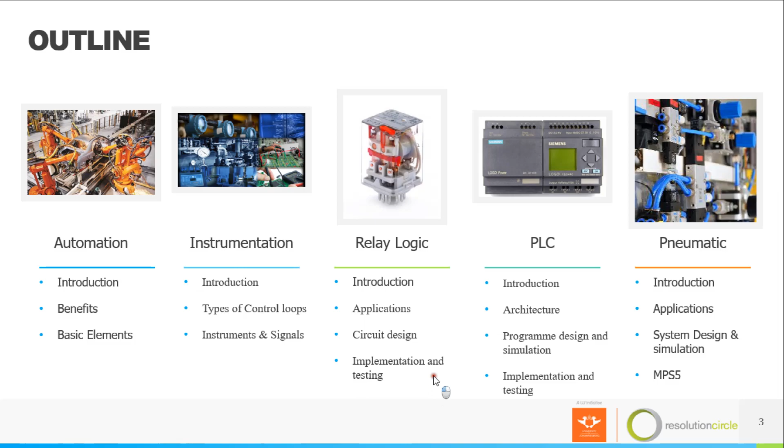One may ask, what is automation? Automation is any system or anything that works with minimal or without human assistance. So if you go to the workshop, let's say for instance after lunch or in the morning, you'll find the workshop dark. The moment you step in, the light turns on. No one is switching on the lights. They switch on automatically because of a PIR sensor. The motion detector detects your motion, then switches on the light. As you leave the workshop, the motion detector detects that there is no one in the workshop, then it will turn off the light.

The manual way of doing it is the way we do it at home. We have a switch on the wall. When you want to switch on the light, you press the switch, the light comes on. You press the switch again, the light comes off. That is the manual way of doing it. To automate it, you just put a sensor that will detect if there is someone in the room, then the light will be on. If there is no one, the light will switch off.

Another example will be automatic cars. So what happens with automatic cars, instead of you changing the gears, the car changes the gears by itself. As you accelerate, it will change from gear 2 to gear 3 as you accelerate. The only thing you have to do is to accelerate or brake.

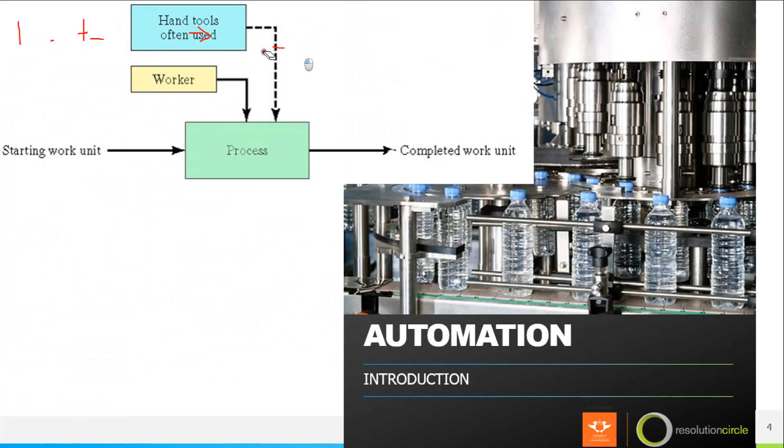So what I was explaining basically is what you see on the screen. So our product used to start here, then with manual work or your hand tools, you will do the job, which will be the process. Then we'll have a complete product.

Then we migrated into a second or third industrial revolution. Now it's both human and a machine that do the work. If you go to most manufacturing plants today, you'll see there is a section where there is a robot that does the work. When the robot is done, a human being will take that to another station.

But as we move into the fourth, as the technology progresses, it will be machines that will do the work, because they will be automated. Everything will be done automatically.

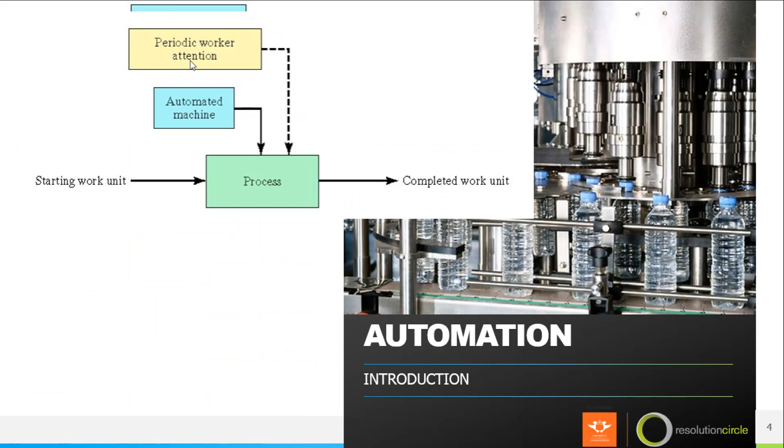So we have three types of automation: programmable automation, flexible automation, and fixed automation. Programmable automation is where you can manipulate or change the algorithm. You can say, today we are manufacturing a 2 series. Just like on this picture, these robots, you can change the robot to say, today please produce a 2 series. Tomorrow the robot will produce a sedan, you can change it. You can have a variety of products that are produced by this robot.

Today, this robot you can teach it to produce this kind of product. Tomorrow you teach it to produce this kind of a robot, produce this kind of a robot. So because of its flexibility in producing different types of products, the quantity of production is less, because it is diversified. You can teach it to do this, tomorrow you tell it to do this. As you can see, it is not able to produce a huge number of products, unlike a fixed automation.

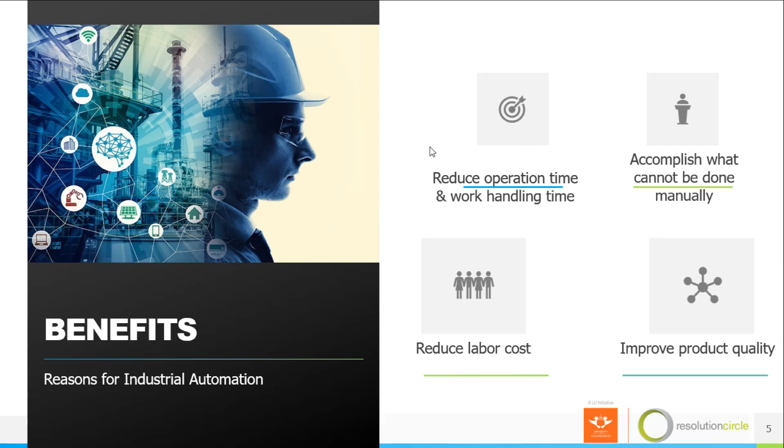We have building blocks when we are building an automated system, or automating something, changing something from manual to automatic. I've listed the basic elements: control systems, sensors and actuators, and logic controller. The control system is when you'll have to choose, in your development phase, whether your system is going to be an open loop system or a closed loop system. How is this going to happen? If 1, 2, and 3 happens, what must happen after this? That's when you are building your logic.

Then we have sensors and actuators. Sensors and actuators are the ones that do the physical job. Sensors bring information, or the state of your process, to your logic controller, to say this is what is happening now. Then the logic controller must execute a decision based on the algorithm or logic that you are building for your system, and then the actuator will do the physical job. So actuators receive commands from the logic controller and execute physical work. Things like motors, or if you are working with pneumatics, things like pneumatic cylinders. So anything that does the physical work, or converts the signal or command into physical action, it is an actuator. The actuator is the one that will do the job.

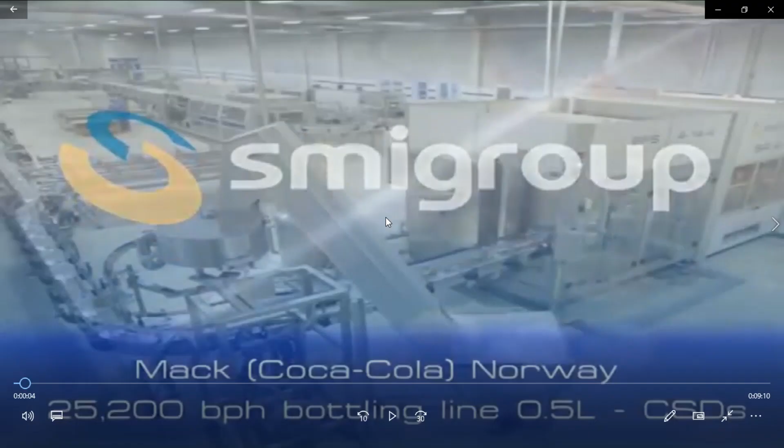So I have some videos I want to show you of automated plants. Remember, automation increases production and reduces labor cost and working time. Here I have a factory, a Coca-Cola factory, producing 25,200 bottles per hour.

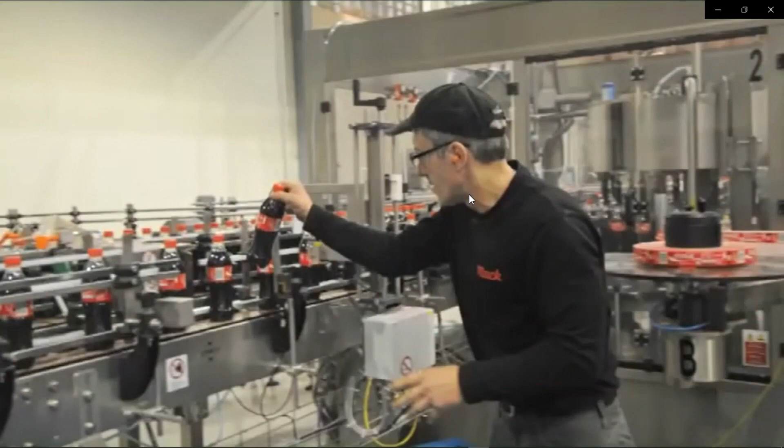As you can see in the factory, it is empty. We only have this one person working in the factory because most of the things are automated.

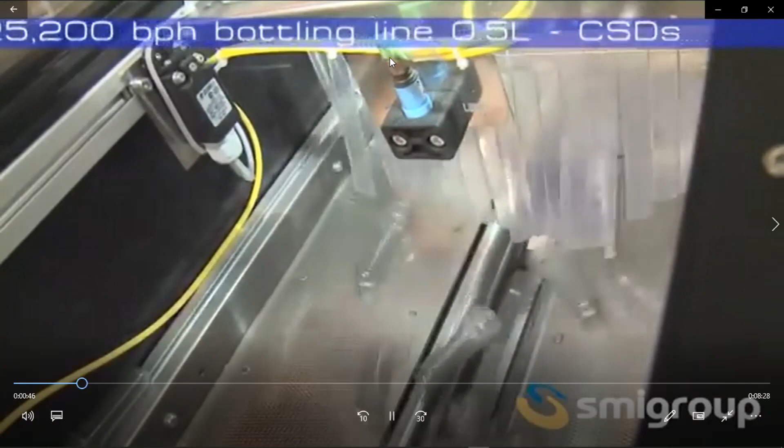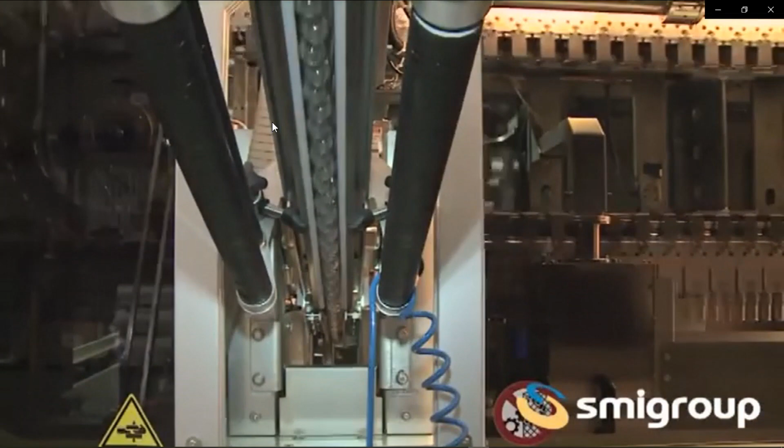Okay, I don't know what is happening with my video. My computer, it's doing things.

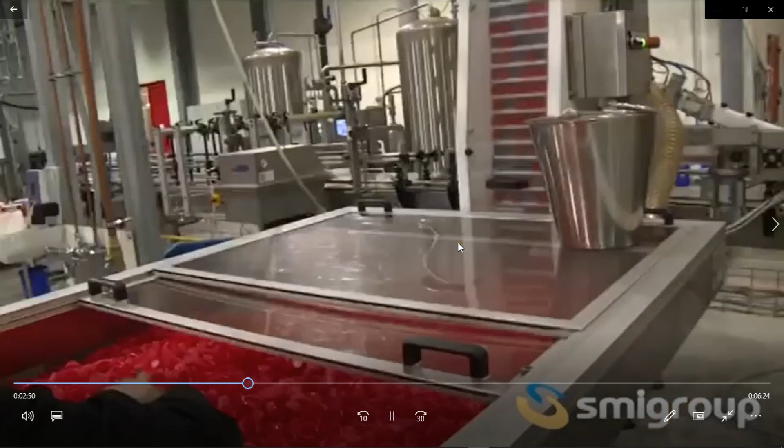Now the bottles are being washed, rinsed, and filled. Pneumatic system. When we come to pneumatics, I'm going to explain some cylinders and pneumatic systems. We have an actuator here, we have a motor.

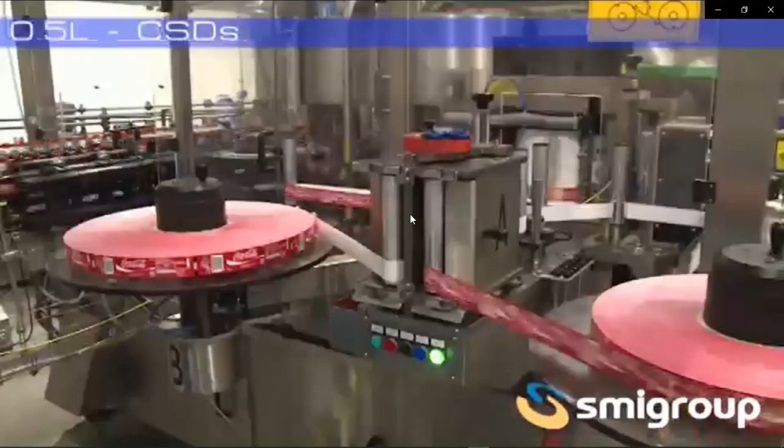Just look at how many bottles, how much Coca-Cola this factory produces. With humans doing this, was Coca-Cola going to be able to produce this number in a short period of time? So technology really helps us save time, reduces working time, and brings us things we're not able to do otherwise. You see, this is a sensor. Technology can achieve those things.

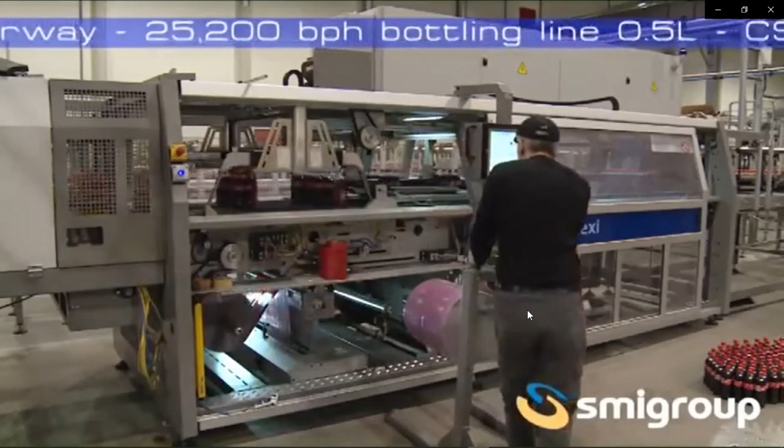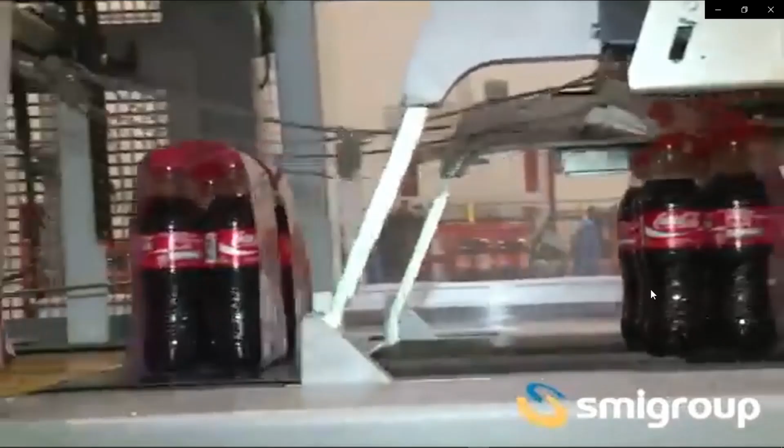Remember the phases that I showed: phase one, phase two, phase three. So what is happening in this factory is actually phase four, phase three, where it's monitoring or checking how the system is.

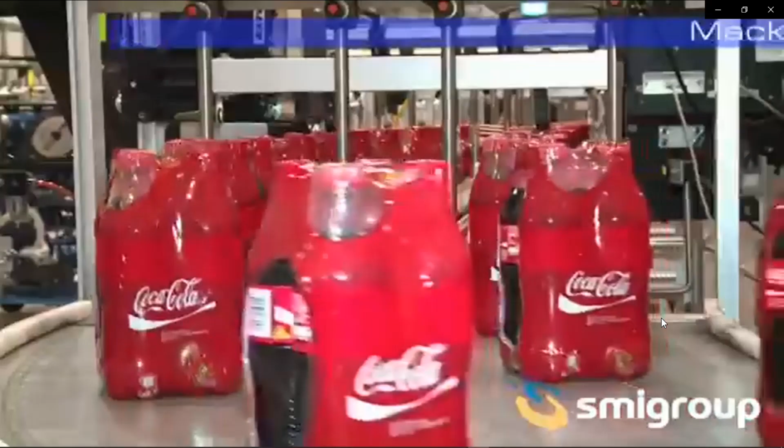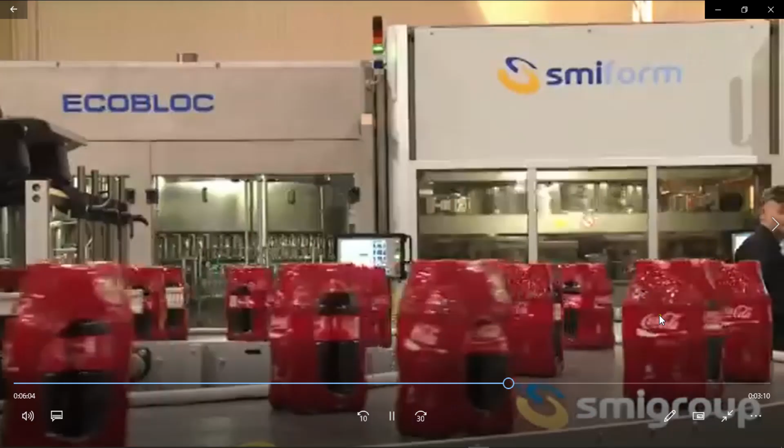Automation comes to take people's jobs. Well, it's both true and false. In each and everything, we have a good and bad side of it. Technology has come to make life easy, and the bad side of it is that most hard labor jobs are being replaced by robots. But now, who's going to do maintenance on these robots? Who's going to program these robots? Who's going to build these systems? So what is happening is there is a shift in the job market.

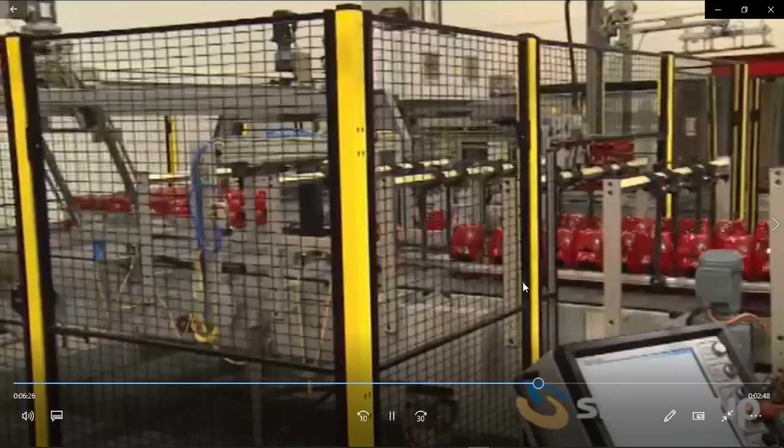You see, these sensors count how many packs have passed. Now here they're going to be stacked.

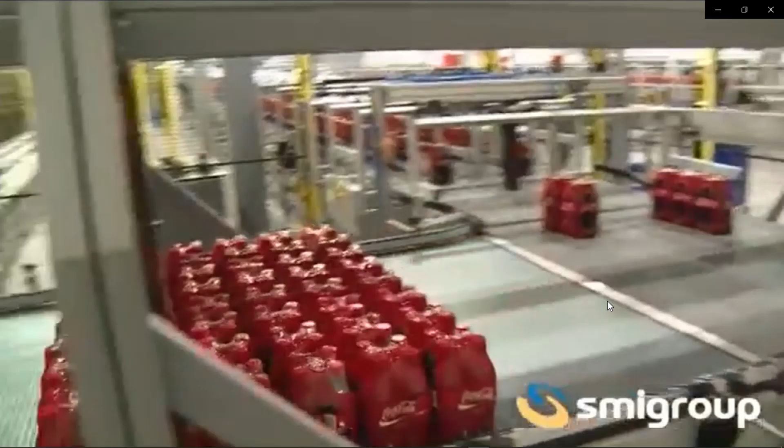The fourth industrial revolution is not only going to affect the engineering job market, but it's going to affect a lot of jobs. There is a shift in the world of working. There is now a new, better way of doing things.

As you can see, the robot can stack that nicely and accurately without any human error. And as automation comes, it makes the working environment much safer than it is when it is human beings who do most of the labor.

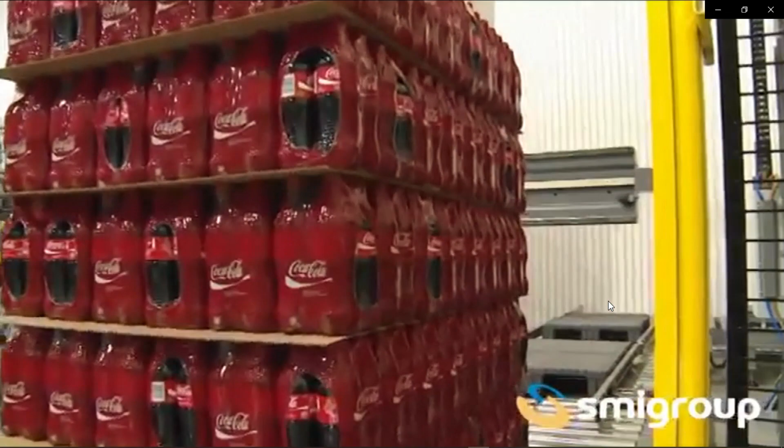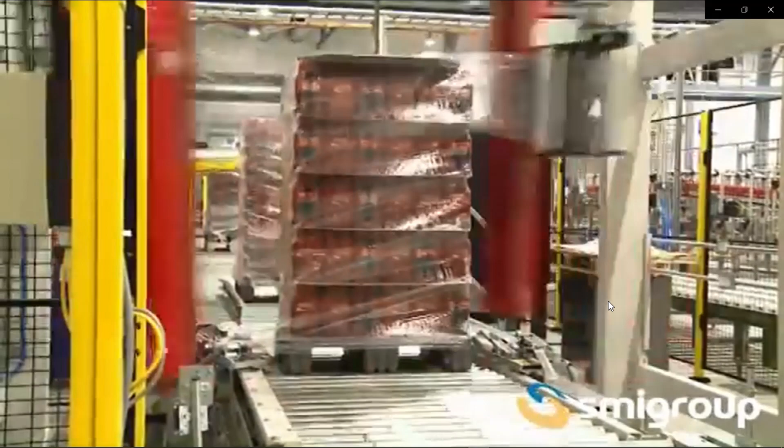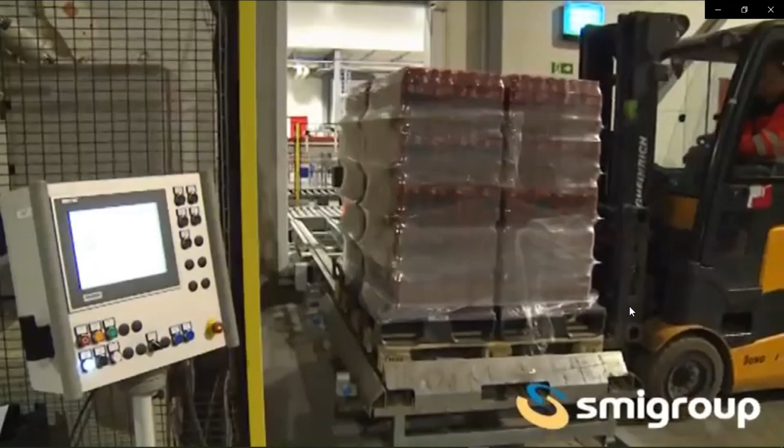Remember the three basic elements I spoke of: control systems, sensors and actuators, and logic controllers. Most of the factories, or most of the industry, will have different types of controllers. We're going to be doing PLC, but I'm going to expand as we get into that section. Then it's done - the product is ready for market.

Instrumentation is defined as the art and science of measurement and control of the process variables within.

My computer is messing with me.

So I was saying instrumentation is defined as the art and science of measurement and control of process variables within a production or manufacturing area. What do I mean about process variables? We have 4 process variables that we're going to be controlling: pressure, temperature, flow, and level. Although we have other process variables, the main focus will be on those 4.

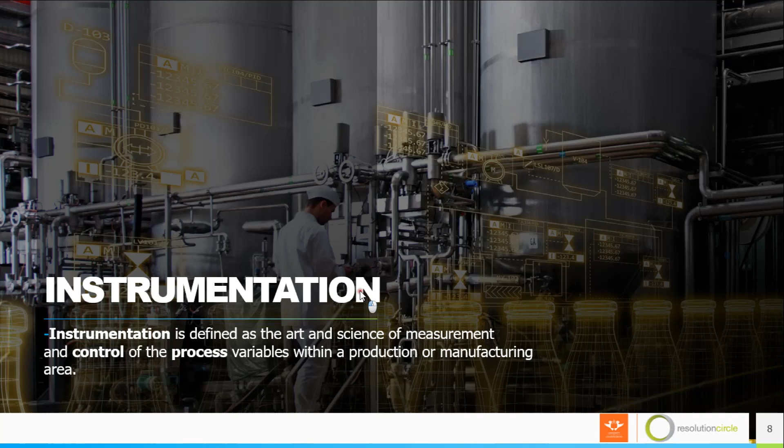The other process variables might be conductivity or pH, which checks the acidity of a substance, if it's acid or a base.

So let's move to control systems. We have 2 types of control loops: an open loop control and a closed loop control. With an open loop, there is no feedback to your controller to inform it about the state of your output. If what you set on your input to say, I want this kind of product at this value or ratio - with an open loop, there is no link.

For instance, a good example of an open loop system is a washing machine. There is nothing that tells the washing machine whether your clothes are fully washed or not. It only depends on the timer. Most open loop systems are time-based programs. There is no link between an output and the controller.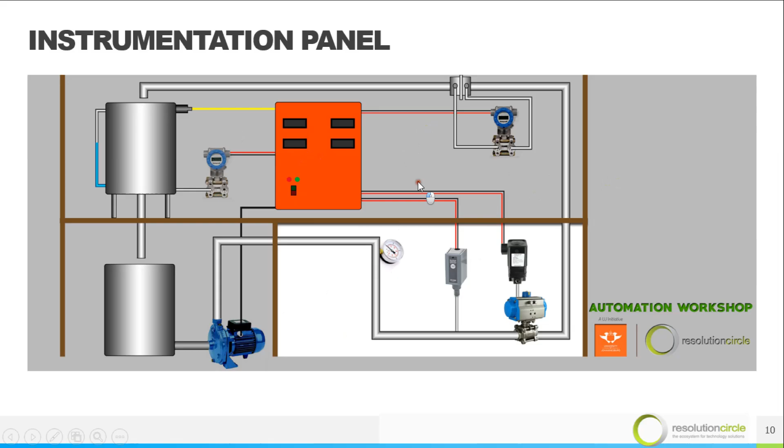So this is the panel that you're gonna be working on in the instrumentation section. We have different types of instruments. We have a pump, we have a gauge, we have the instrument that you saw, this one and this one. These are transmitters.

We have a transducer. The transducer converts one form of energy to another. For this one, it converts electrical signal into pneumatic signal, because this actuator or control valve only understands a pneumatic signal. So on your controller, you'll inform your actuators to say open 50%. That signal is gonna be transferred electrically. If you're using a PLC, it might be a 4 to 20 milliamp signal. Then it will come to this transducer, which will convert it into a pressure. Then this will open according to the pressure applied.

Okay, we have here a sensor, as I've explained earlier on. Those sensors inform the logic controller about the state of your process, or of your system. Things like push buttons, or here I have a capacitive proximity sensor. It only detects anything. If you bring anything close to it, it will detect, then it will send a signal.

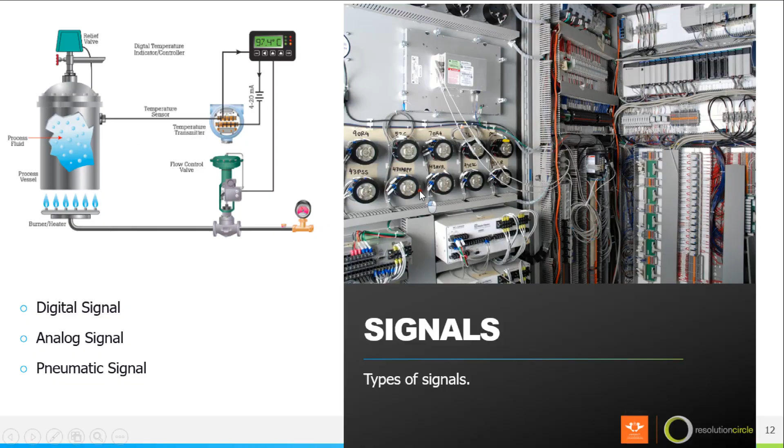These are the things we're gonna cover. I've explained about a pneumatic signal. When we come to the instrumentation section, we're gonna have...

Relay logic, where you're gonna build logic using relays. A relay is an electromagnetic switch which has contacts and has a coil. As you energize the coil by applying voltage to it, it will change the state of your contacts.

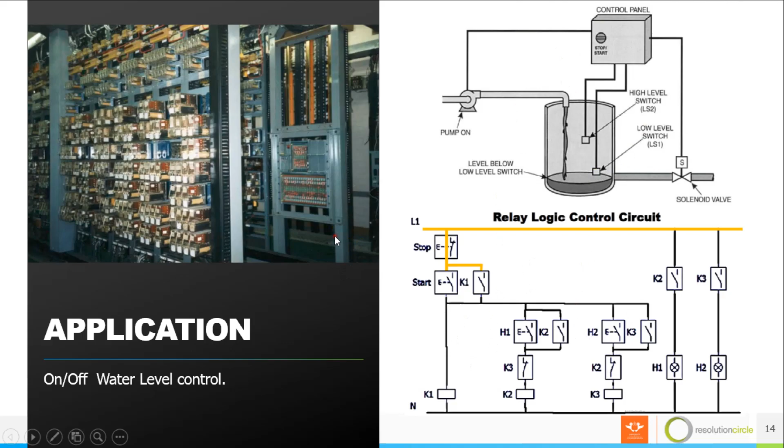So, for instance, in this system, for you to fill up this tank of water, and when it's full, the pump will stop feeding the tank. You'll build a system, you'll connect your relay circuit. You'll build the logic to say whenever a low level switch is triggered, start filling water, whenever a high level switch is triggered, stop filling water. This is an example of an on and off system, of which we'll expand more when we get to the instrumentation section.

Then we have PLC. It's a section where we're gonna build systems using a programmable logic controller. A PLC is a specialized computer used in process automation, which has a programming memory for internal storage of your instructions or your logic, and it has an input module and output module, where in the input module you'll connect all your sensors, and on your output modules you're going to connect all your actuators.

We have different brands we're going to be doing training on. The first one will be Siemens LOGO. The second one will be Allen Bradley Micro 820. We also have Siemens S7. We have Schneider. We have Unitronics. It is a wonderful PLC. But I'm gonna show you the project from Unitronics.

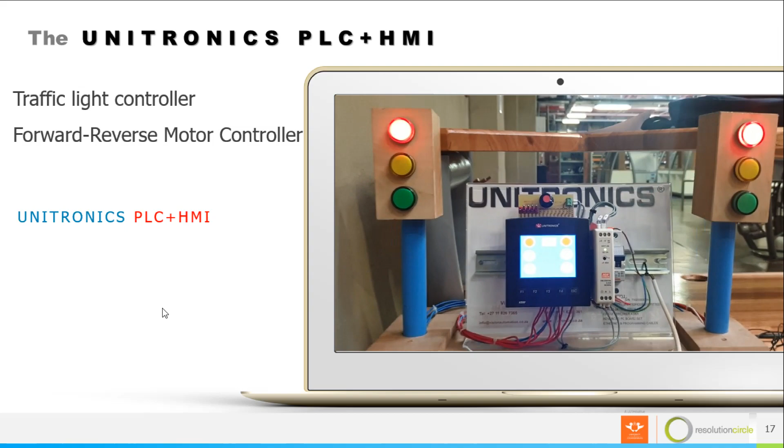In this one PLC, we're able to build two systems: one for a traffic light and one for a motor for reverse/forward control. Right now we are changing into the motor section. Now it's running on reverse. After a few seconds, it runs forward, all in one PLC.

But you're gonna see these beautiful things when you get to the workshop. Automation is the workshop of innovators. You're gonna innovate. You're gonna build systems.

Then you're gonna go to the pneumatic section. What is pneumatics? Pneumatics is the use of pressurized air to control mechanical workpieces. So we use compressed air to do the work. It is so wonderful, one of the best sections. Surely you're gonna enjoy seeing that the air you breathe can actually do work. You can use it to automate some of the things. It is beautiful, it is beautiful.

The applications of pneumatics are clamping, shifting, positioning, orientating, picking and placing. Why is pneumatic mostly used for this type of application?

Pneumatic is cheap to install and to maintain. It is clean and it is safe. It is easier to use than other systems.

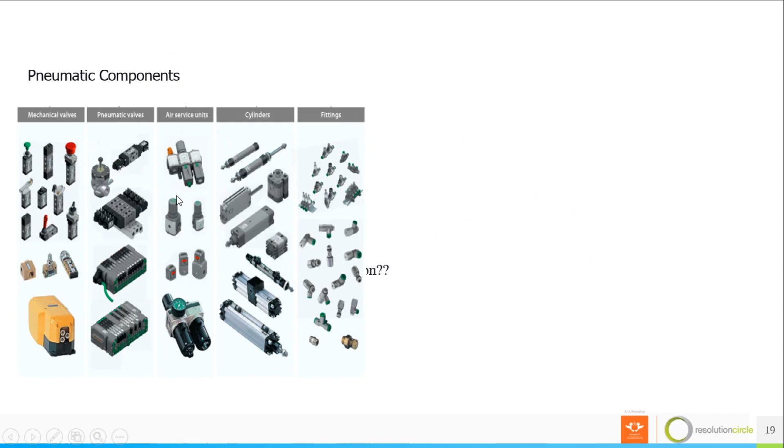So these are the pneumatic components, you see them. We're gonna go into details in other videos. I'll put the links below - links for all the sections for PLC, for pneumatics, and for instrumentation. So these are the control valves for the pneumatic systems.

And we have a two by two way valve. The first two represents the number of ports and the other two represents the number of positions. But don't worry, when we get into the pneumatic section we will go into depth. You'll come to understand what we mean by 2 by 2.

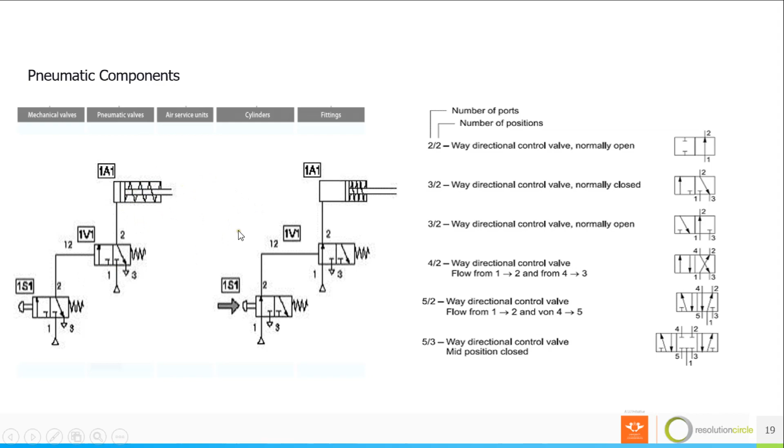This is how we build the pneumatic circuits. This is a single acting cylinder. It has a spring inside. As you apply pressure, it will advance. As you cut pressure, it will then retract automatically because of the spring.

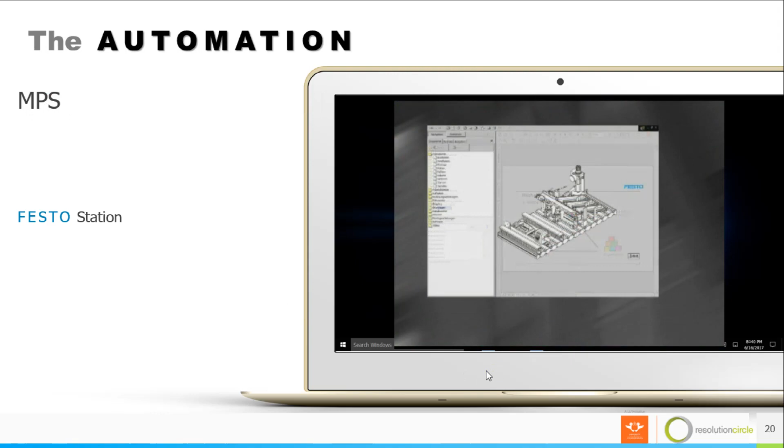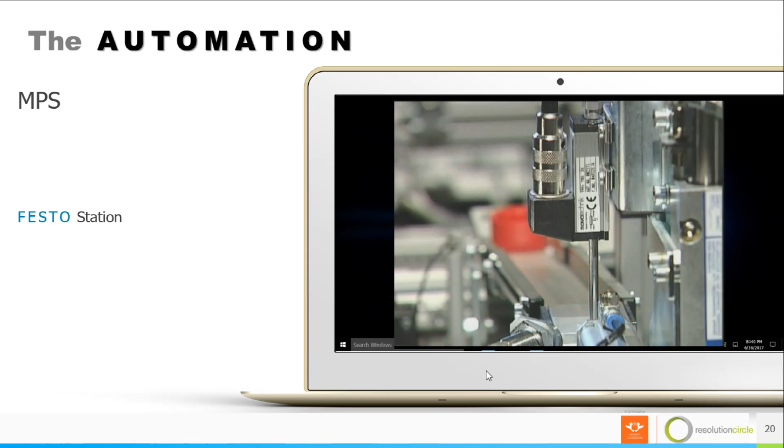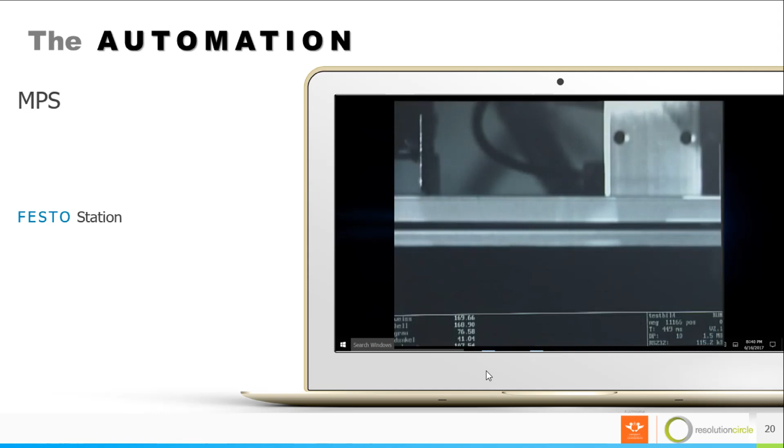Increased productivity and greater quality. Successful manufacturing companies achieve these aims with innovative automation technology. Experience the fascinating processes of automation. Discover a world in which state-of-the-art technology controls material flow, handling systems, and robots. For operating personnel, maintenance and troubleshooting are of key importance in ensuring that the systems don't go down. There's great demand for specialist knowledge and system expertise. Festo Didactic has developed an industry-focused learning system to provide the MPS 500 network system and stations and modules right down to the individual component. MPS 500 can be used to clearly illustrate automation in all its complexity. Innovative software and a broad range of media convey knowledge about specific topics and technologies. These include learning and simulation programs on pneumatics, hydraulics, PLC technology, and robotics. Mechatronics Assistant gives you both modern documentation on CD-ROM and training material in one. Accompany a workpiece on its journey through the MPS 500 system. The distributing station separates the blank from a magazine. A changer moves it to the next station, which checks it. How beautiful automation it is. Material recognition, material transport, height measurement. The blank is checked and then passes via an air slide to the production process. Apropos transport, in the MPS 500 system, many different pneumatic drives join to ensure optimum material flow. Standard cylinder, swivel cylinder, linear drive, short stroke cylinder, rodless cylinders or flat cylinder. Each drive type has its own special advantages. But let's get back to the assembly process. The pallet transport system brings the blank to the next work cell, where the blank is transformed into a cylinder body. Grip workpiece, transport, set down. The rotary indexing table positions the blank for drill hole checking. Machining and collection. A handling device with a pneumatic gripper transports the finished cylinder body back to the pallet. A suitable gripper is required for each handling task. For example, a parallel gripper with different kinds of gripper fingers, or a suction gripper, or a robot gripper. The next work cell tests whether the cylinder body can be assembled, and it does this right on the transport pallet. The highly flexible camera system detects errors immediately. Are all 3 tabs present? Are the dimensions correct? This helps to ensure the quality of the assembly process.

The cylinder body reaches the assembly station. Grip and move - this is an easy task for an industrial robot if it's correctly programmed.

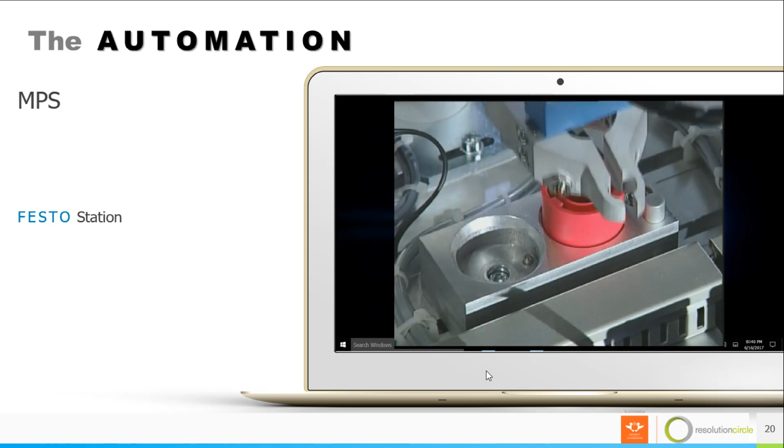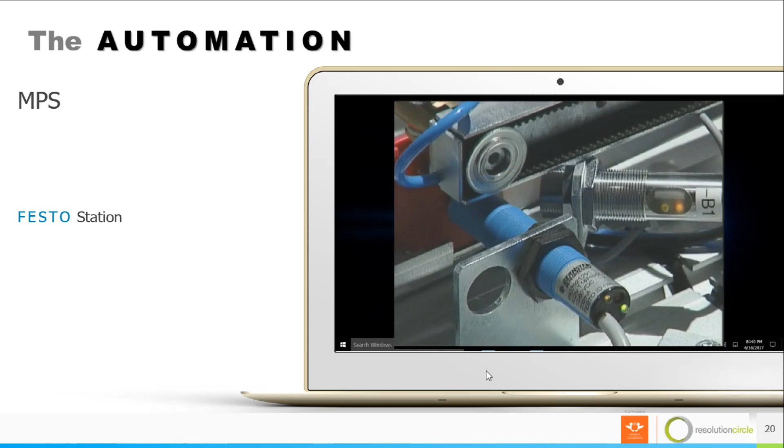Position control: here a reflex sensor with optical fiber helps out. The reflex sensor is just one of many sensors in the MPS 500 system. There are roller lever actuators and micro switches, fiber optic sensors, inductive, capacitive and optical sensors, all delivering the right signals for the controller. They are the senses of an automated system.

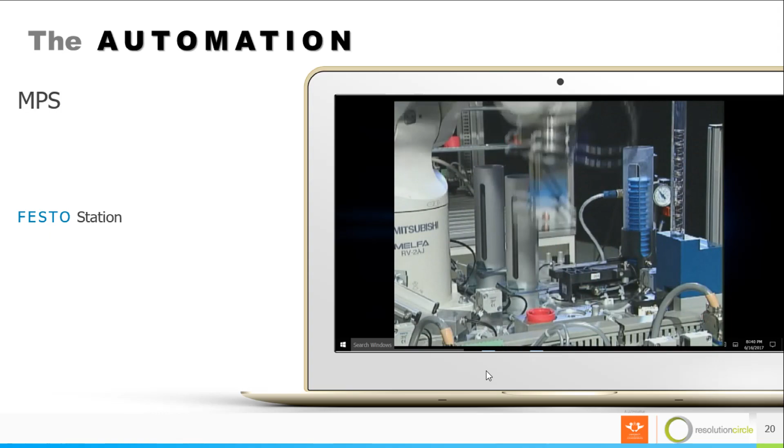Back to the cylinder assembly. Fetch the cylinder piston from the magazine and insert it. Remove a spring from the gravity feed magazine and install it. Pick up a cylinder cap and orient it.

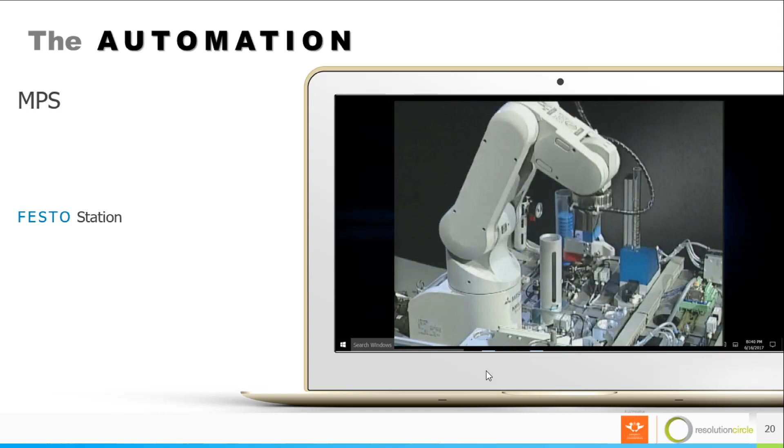And screw it onto the cylinder body. The interaction of software, electronics and mechanical elements is particularly impressive in this robot assembly station. The cylinder is now assembled. It's placed in storage via the pallet transport system.

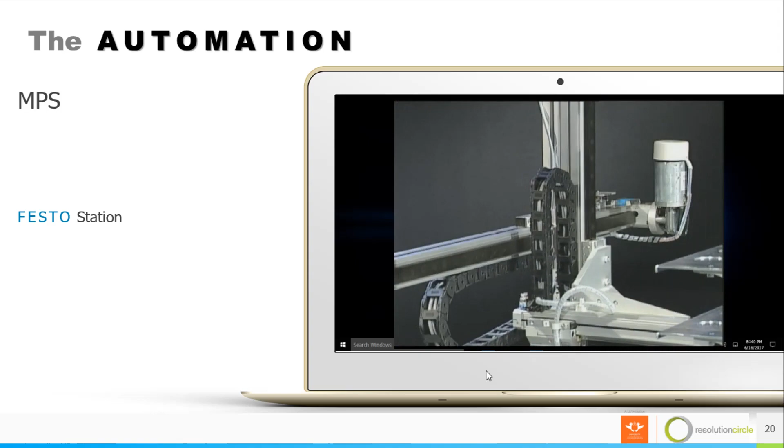A multi-axis handling system with parallel gripper picks up the cylinder and places it in a free storage location. DC servo motors drive the axes of the handling system, which can move to 20 different storage locations.

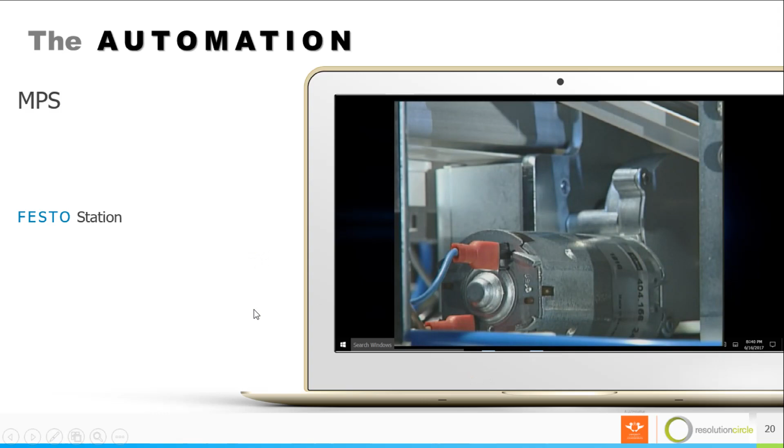By the way, there are many electrical drives in the FMS 50 system: AC motors with frequency converters, for example, DC geared motors with helical gear unit, DC geared motors with worm gear unit, such as for driving the rotary indexing table, or the drilling spindle drive with planetary gear unit.

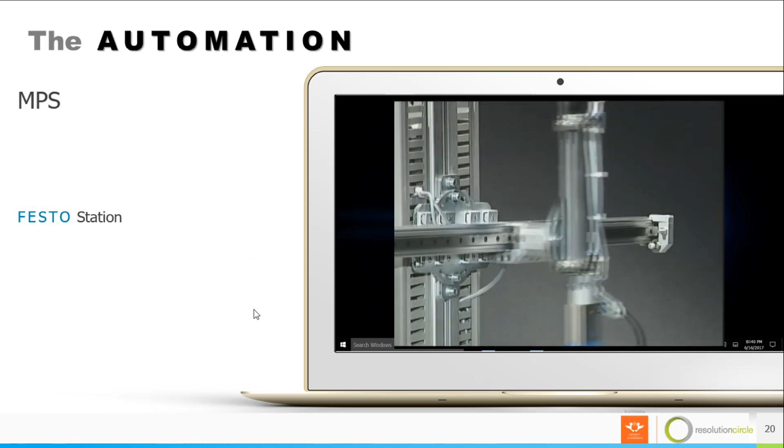If an order has been received, the transport system takes the cylinder to the outgoing goods area. This is Pick Alpha, a handling device with pneumatic drives from Festo. It picks up the cylinder and places it on the sorting conveyor.

Sensors detect the color and material of the cylinder. They initiate appropriate sorting. The assembly process is now complete and the cylinder is ready for collection.

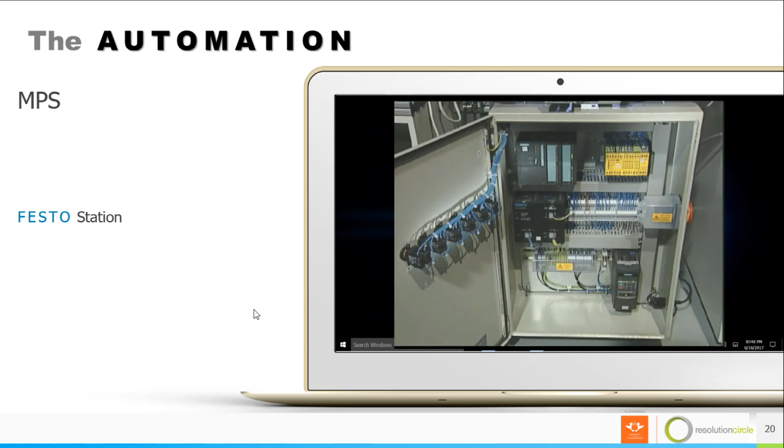A few more words about control. Distributed control is responsible for smooth operation of the system. Each station has its own controller. This results in small, simply structured units.

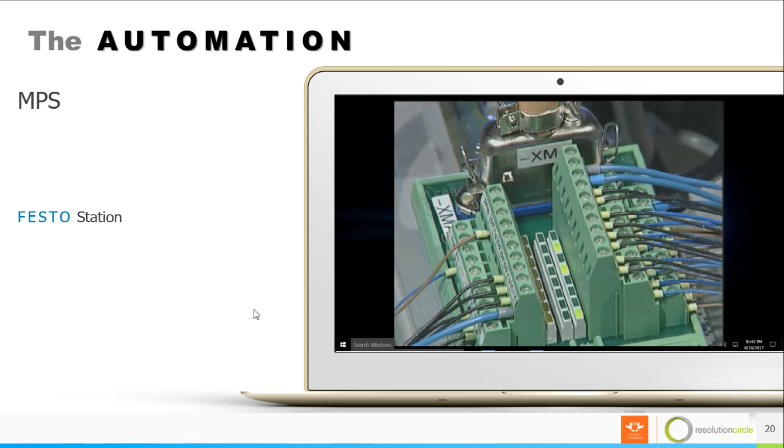The AS interface field bus distributes signals throughout the system and organizes optimum exchange of signals between the transport system and the station. System interfaces are clearly defined and identified. I/O terminals consolidate the signals and show the current status. The control panels of the individual stations are sturdy and clearly structured.

The bottom line: the FMS 50 system from Festo Didactic is the ideal training environment for nearly all aspects of automation. The system offers cost-effective entry into the world of flexible manufacturing and integrated systems - modular, expandable, and based on MPS stations.

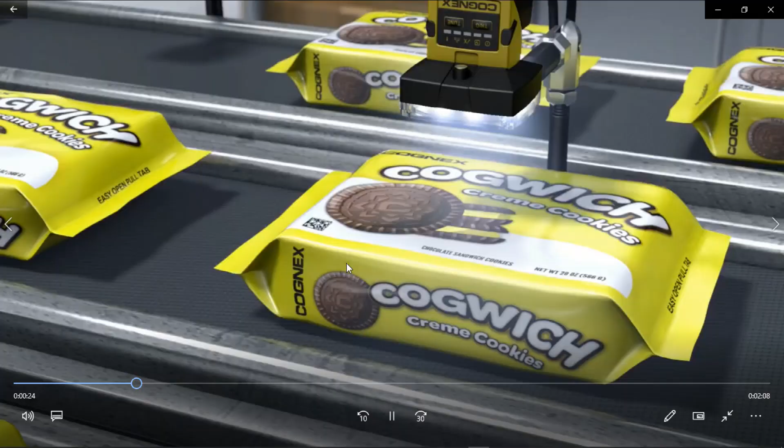So one may ask, where exactly can we use such an application or a system in real life? This company produces sensors.

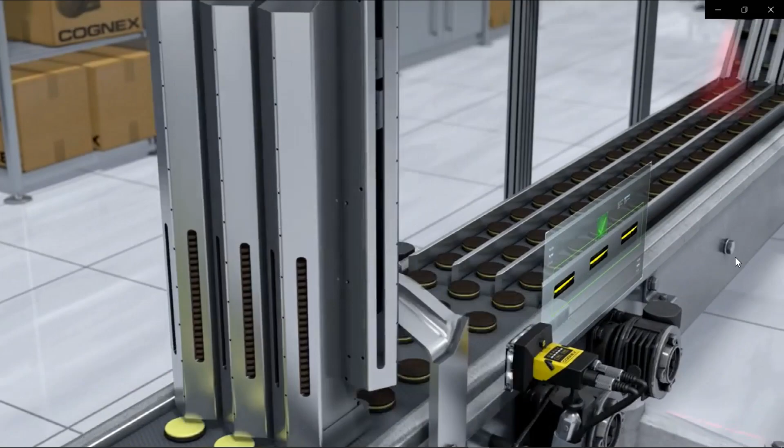Here the company is producing cakes or biscuits, if you may put it. So the camera detects if all biscuits are perfect, they're in good shape, there is no defect. If there is a defect, it rejects it.

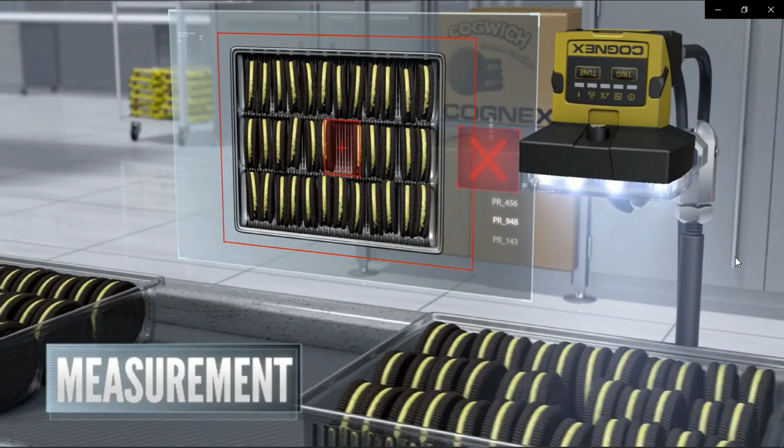So there is no need for a person to keep checking if all the biscuits are rightfully cooked or rightfully arranged. These smart cams can detect - as you can see there - then surely that pack is going to be rejected. Look how many cakes are being produced at the same time.

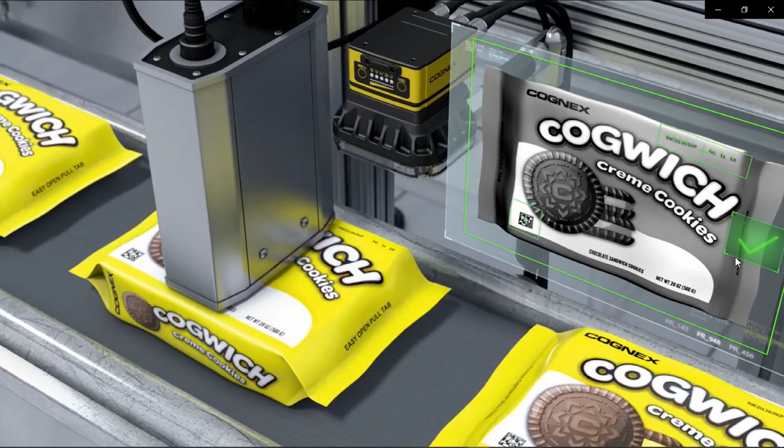Automation is beautiful, eh? And this one detects, checks everything.

Then those which are approved are then packed, scanned, then the sorting will happen. Those that must be rejected will be rejected. Those that must be taken to the storeroom will be taken.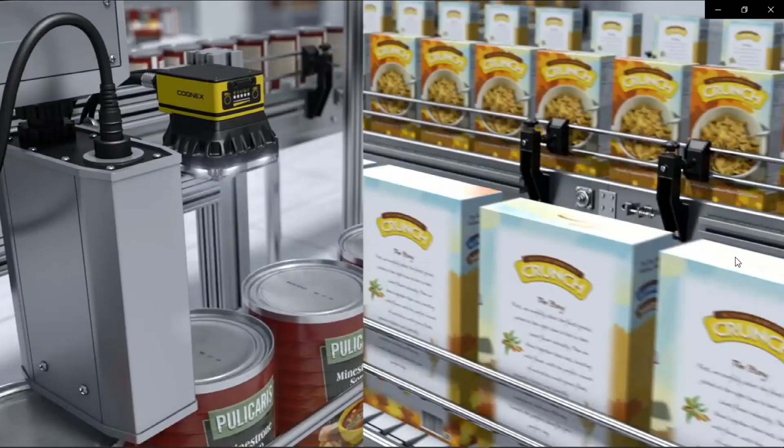So, okay. I have another video that I have.

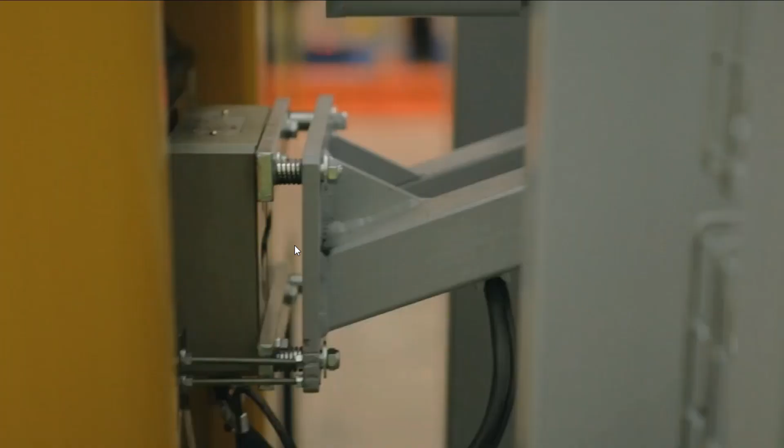Okay, basically on this video, what I wanted to show you is mapping - how, instead of having a forklift that takes up too much space, you can have a pre-programmed forklift. There is a good factory that does this very nicely, like Amazon's factory and Alibaba's factory.

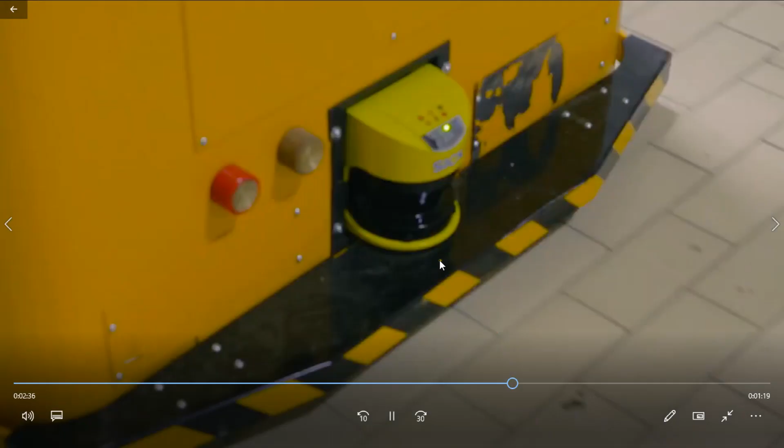So this is the final video that I want to show you, how automation has really helped even during this coronavirus crisis in China.